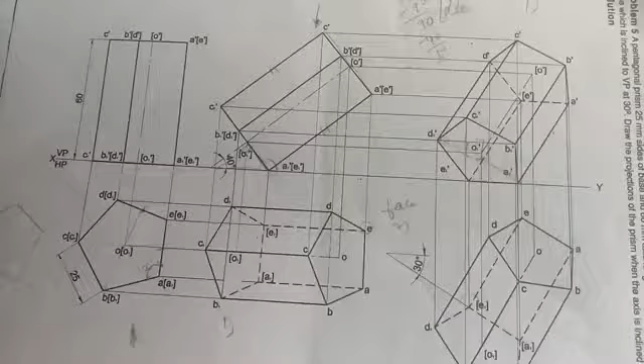Okay, the continuation of the previous problem. We have to discuss about the second position, how to write the second position. According to the problem, he said that the axis is inclining to 30 degrees.

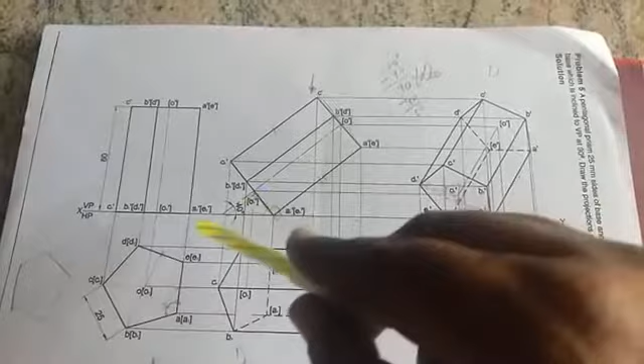In this case, if the axes are inclining at 30 degrees, we can't directly write the axis or place the edge directly. Because of this, there is one formula for you.

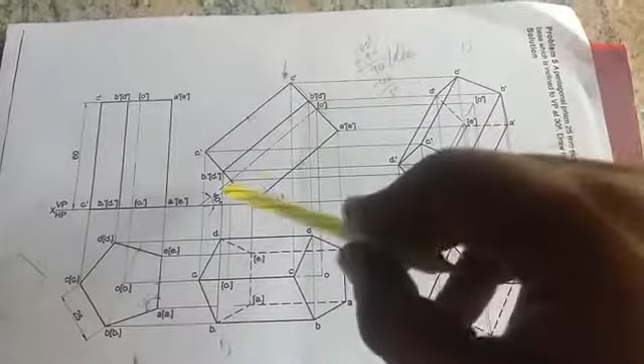So this angle, whatever you see here, if you extend this 30-degree line, this angle of the triangle is 180 degrees. Since he has given 30, the other angle should be 90 degrees. 180 minus 90 is 90. 90 minus 30 will give the angle 60.

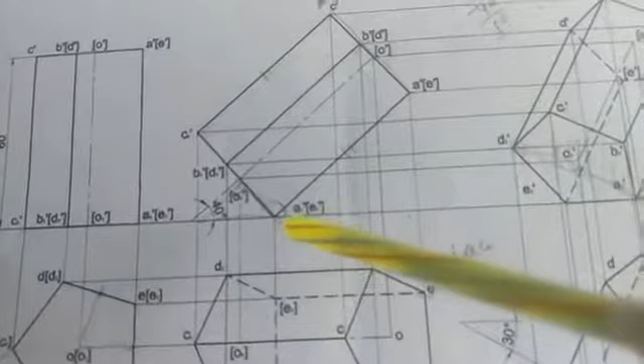So take any point on your xy line, call this point a1 dash of e1 dash, and measure 60 degrees. That is very important. Measure 60 degrees.

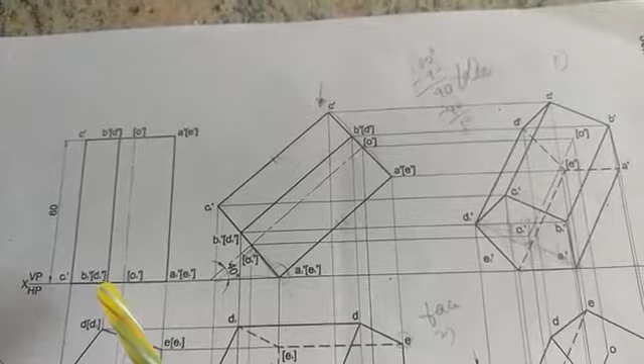After measuring 60 degrees, we have to measure a1 dash of e1 dash, c1 dash line. Put your compass at the point here, cut an arc, this point is called c1 dash. Now measure a1 dash of e1 dash, b1 dash of d1 dash. Put your compass at the point a1 dash of e1 dash, cut an arc along the 60 degrees line, then you get the point called b1 dash of d1 dash.

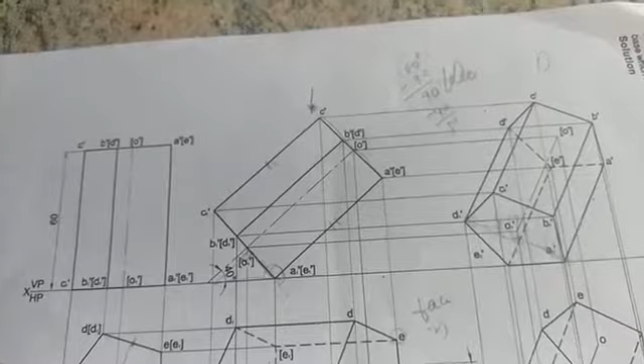Now measure a1 dash of e1 dash, o1 dash. Put your compass at the point a1 dash of e1 dash, cut an arc. The same procedure you have to repeat here.

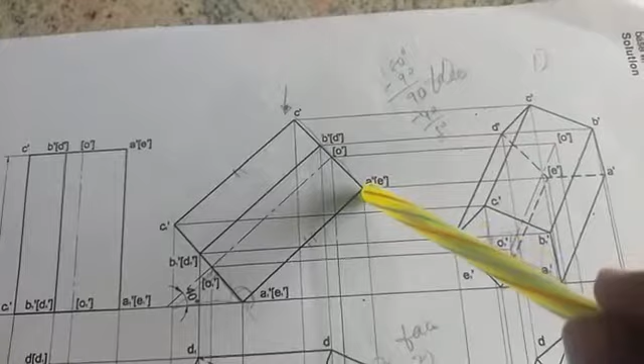Measure a dash of e dash, b dash of d dash. Put your compass at the point a dash of e dash, cut an arc, then you get the point called b dash of d dash. Now measure a dash of e dash, o dash. Put your compass at the point a dash of e dash, cut an arc. You get the point called o dash.

This is the way we have to write whenever the axes are inclining to a certain angle. So the remaining all these lines should be thick lines except your center line.

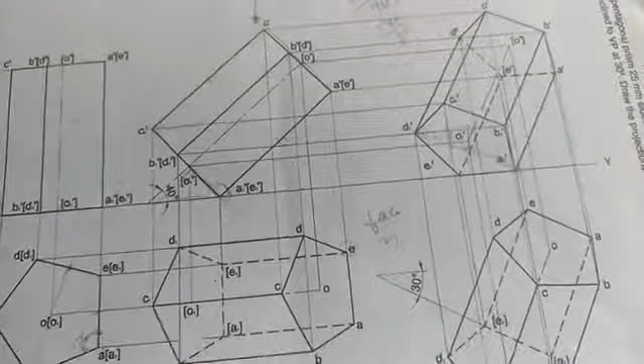The corresponding view, first you have to draw this face, this face belongs to this one. So the intersection of a1 dash and a will give the point called a1.

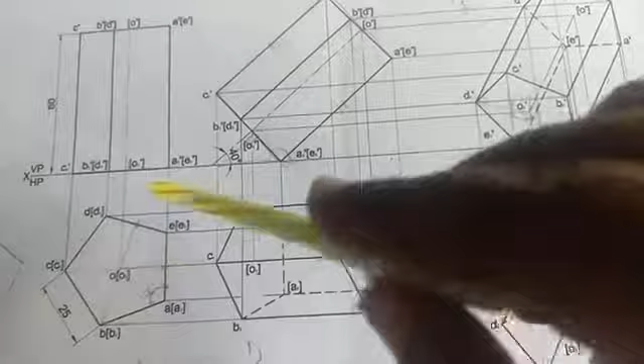Intersection of b1 dash and b will give the point called b1. Intersection of c1 dash and c will give the point called c1. Intersection of d1 dash and d will give the point called d1. Intersection of e1 dash and e will give the point called e1.

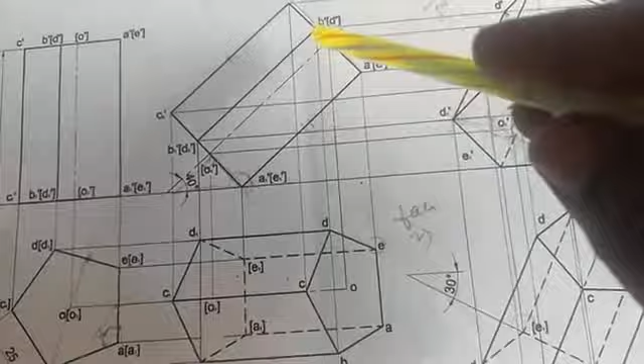After completing this, you have to go to this face. Intersection, first we will start from the alphabet a. Intersection of a dash and a1 will give the point called a. Intersection of b dash and b1 will give the point called b1.

Intersection of c dash and c1 will give the point called c1. Intersection of d dash and d1 will give the point called d1. Intersection of e dash and e1 will give the point called e1.

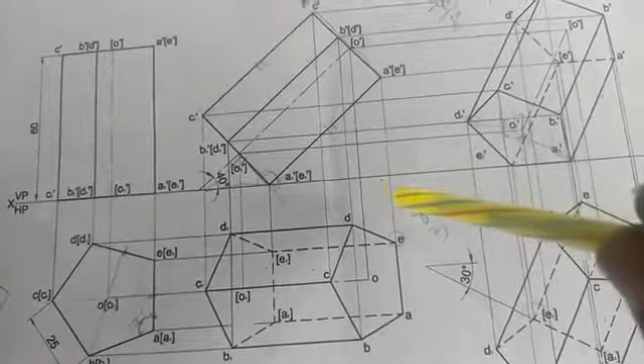Okay, what is my first rule here? Identify all the outside points, join with a thick line. After that, what is my second rule?

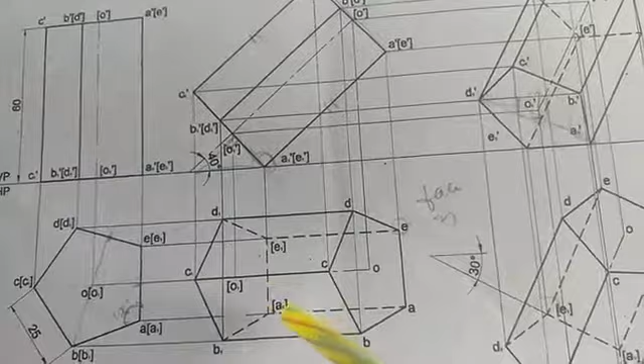If you view from here, you can't see this point a1 dash of e1 dash. This point relates to these 2 points a1 e1. From the point a1 e1, whatever lines pass and connect to a1 e1, and from those points whatever lines pass away and connect to other points, all these lines will become hidden lines.

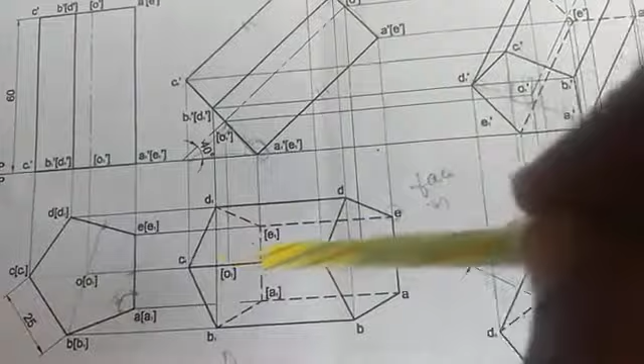After this, what you have to write? You have to identify another 2 points called center line. o1 dash and o will give the point called o1. Intersection of o dash and o1 will give the point called o.

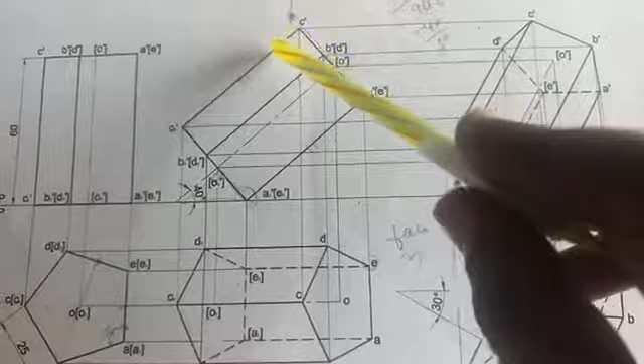Join with the center line, and the remaining points, what are they? c1, this point c dash c1 dash, this line, if you view from here, you can see directly. This line is this line.

Okay, so immediately join with a thick line. This is the way you have to write your corresponding second position top view.

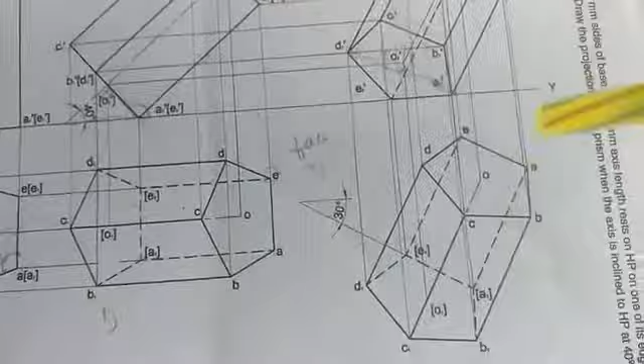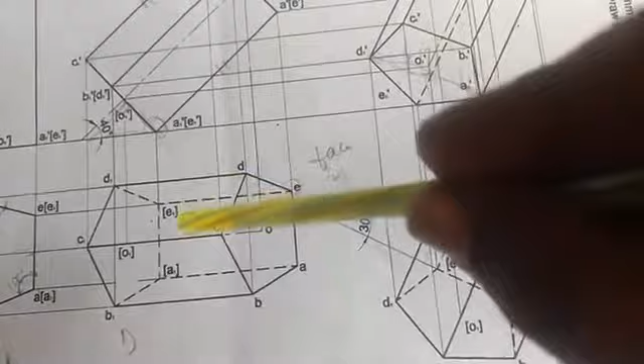Okay, now after drawing the 30 degrees line, take any point called E1. Measure E1, A1. Put your compass at the point E1, cut an arc, you get the point called A1. Okay, take your protractor, keep your protractor here, measure 90 degrees.

Keep your protractor like this, along this straight line, the horizontal line, and draw 90 degrees. After drawing, measure E1, E.

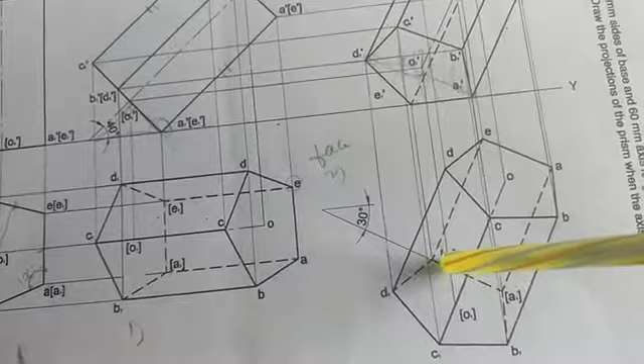Put your compass at the point E1 and cut an arc with the same compass. Put your compass at the point A1 and cut an arc. Then you get the point called E. Okay, all these 4 points you got it.

Now how to get this point? Measure E1, D1. Put your compass at the point E1, cut an arc. Don't change your compass. Put your compass at the point A1, cut an arc.

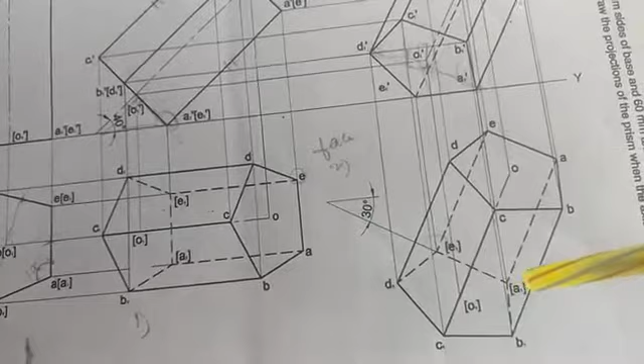Now measure E1. Okay, now what do you have to measure? You have to measure after doing this. Okay, after doing this, what do you have to do? Cut an arc. You got this point.

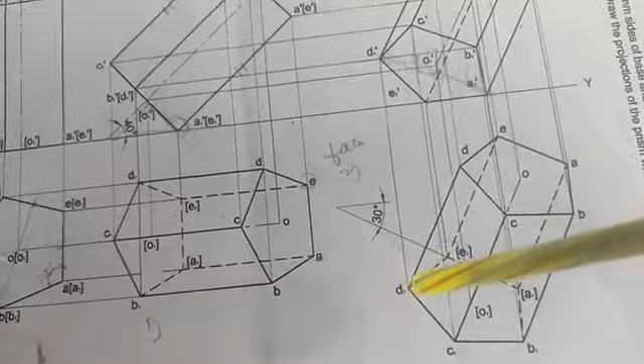Okay, in order to get the accurate point, what do you have to do? Measure A1, D1. Put your compass at the point A1, cut an arc. Don't change your compass. Put your compass at the point E1, cut an arc. Then you get the point called D1, B1.

After getting this, measure B1, C1. Put your compass at the point B1, cut an arc. Don't change your compass. Put your compass at the point D1, cut another arc.

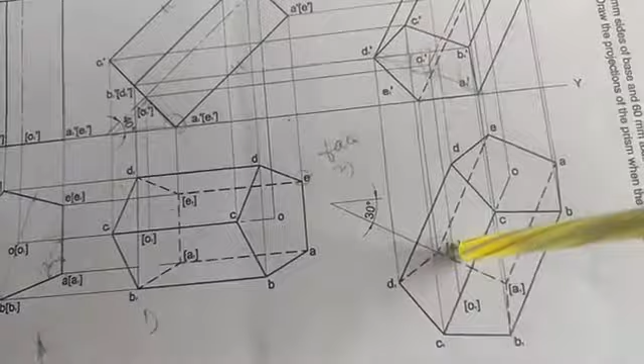The same procedure you have to repeat for this face also. What I have discussed here, the same procedure you have to do for this too. So how to identify the center points?

Measure C1O. Put your compass at the point C1. Okay, along this line, cut an arc. You got the point called O1.

Now measure O1. Put your compass at the point O, cut an arc. You got the point called O1. This is the way you have to draw the third position.

Okay, top view, the corresponding view. First, what I will do is I will draw this face. Intersection of A1 dash will give the point called A1 dash.

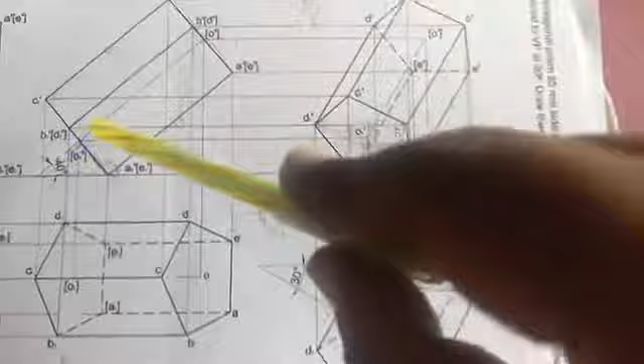Intersection of B1 and B1 dash will give the point called B1 dash. Intersection of C1 and C1 dash will give the point called C1 dash. Intersection of D1 and D1 dash will give the point called D1 dash. Intersection of E1 and E1 dash will give the point called E1 dash.

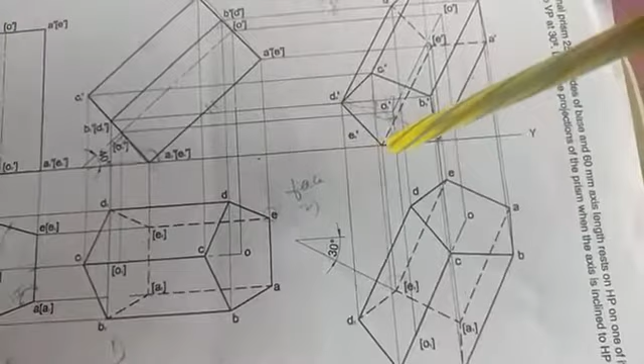After doing this, I have to complete this face. Intersection of A dash will give the point called A dash. Intersection of B and B dash will give the point called B dash.

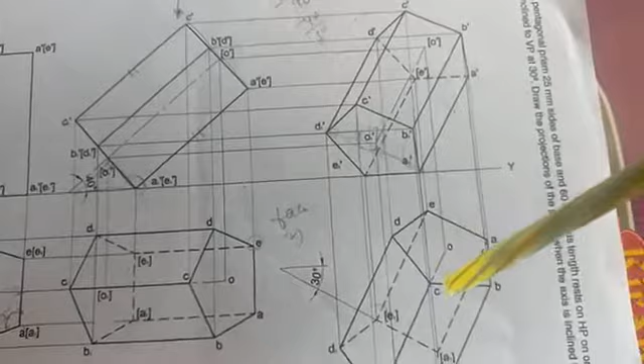Intersection of C dash will give the point called C dash. Intersection of D and D dash will give the point called D dash. Intersection of E, where is my point? Here. Intersection of E and E dash will give the point called E dash.

Okay, what is my first rule here? After completing this, identify all the extreme outside points and join with a thick line. What are those points? Start from here: A dash, A1 dash, E1 dash, D1 dash, D dash, C dash, B dash are the extreme outside points.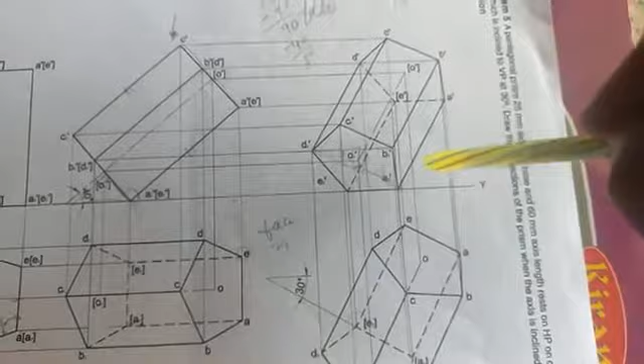After this, what is my second rule? Identify any one face which is very much nearest to you. This face. In this face, identify any 2 points which are very much outside points.

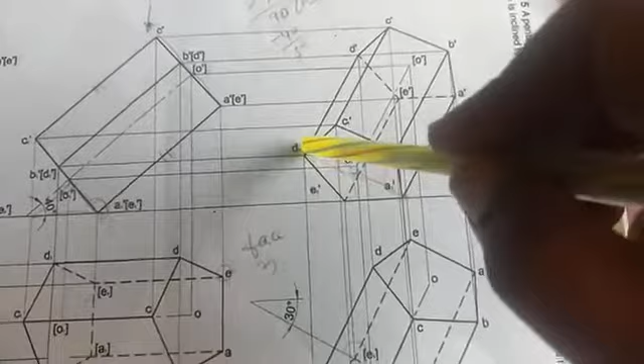These 2 points, D1 dash and A1 dash, are the outside points. Join with a thin line. Below this point, how many points are there? Only 1 point, E1 dash.

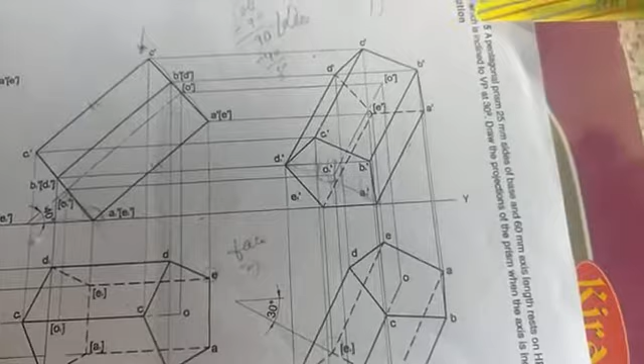Okay, from E1 dash, whatever the line passes and connects to other points, from this point, whatever the line passes away and connects to the other points, all these lines will become hidden lines. Got it? After that, identify the center point.

O1 dash. Where is the point? Here. O1 dash will give the point called O1 dash. O and O dash will give the point called O1.

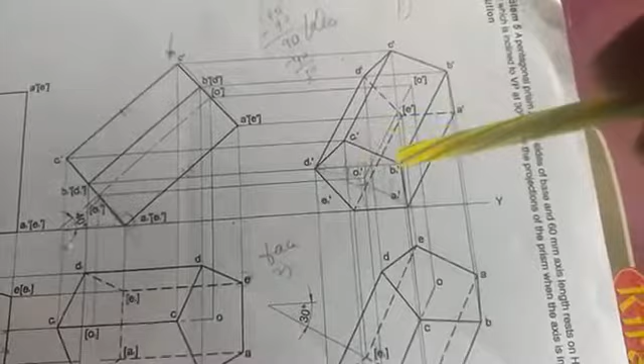Both of these should be in a bracket, because it is inside of this prism. You can't identify this center line directly. So it should be a hidden line, and it should be a center line. This is the way you have to identify it.

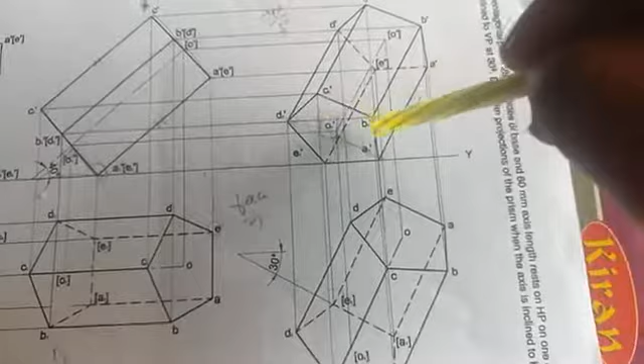Again, I will repeat it, how to identify the hidden lines. Identify any one face which is nearest to you, this face or this face. This is the face very much nearest to you.

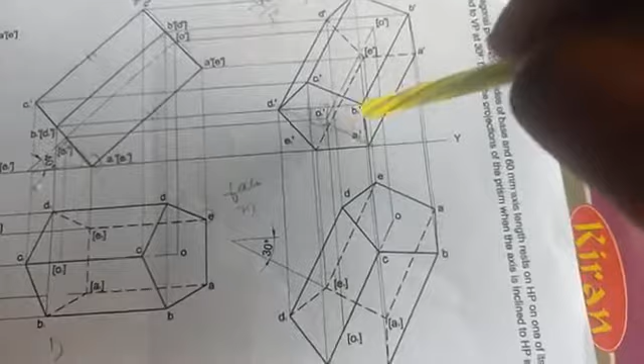In this face, identify any two points which are extremely outside these 3 points. B1 dash, C1 dash, E1 dash is very much inside, so these 2 points are outside. Join with a thin line.

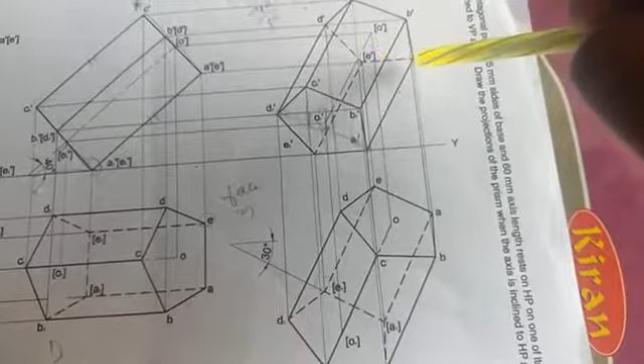After joining this, below this line, how many points are there? Only 1 point, E1 dash. From E1 dash, whatever the line passes and connects to another point, from that point, whatever the line passes away and connects to other points, all these lines, these 3 lines, will become thick.

Dashed lines, those are called hidden lines. This is the way you have to identify the hidden lines and identify the center lines of your prism, a pentagonal prism. Thank you.